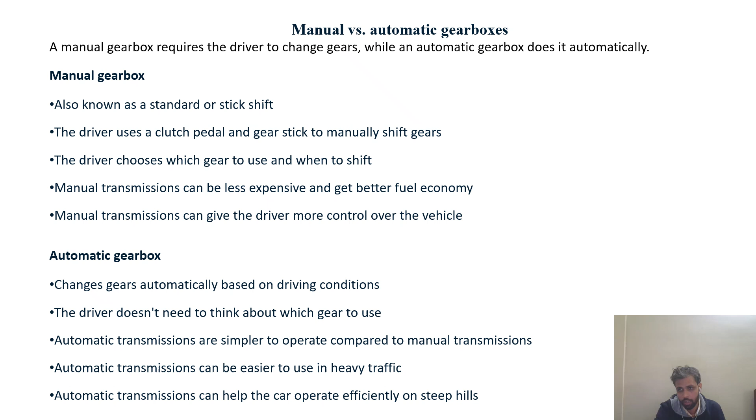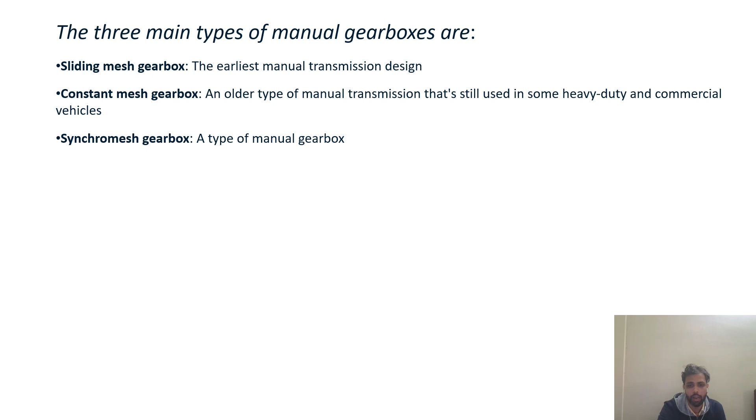The manual gearboxes are classified into three types: sliding mesh gearboxes, constant mesh gearboxes, and synchromesh gearboxes. We will look at all of these one by one.

The first one is sliding mesh gearboxes. The construction of this gearbox can be seen over here. Let me just find out if we have certain details shown.

This is the clutch shaft, or input shaft. This input shaft is connected through the engine, or we can say the crankshaft. Here we get the input power, and as per the requirements, as we go through the gearbox, I am expecting that you guys must be aware with the different gears and their functions.

What happens if a higher gear runs a lower gear? If a bigger gear, with bigger pitch circle diameter, runs a gear with lesser pitch circle diameter, or the lesser runs the bigger one. So I am expecting that you must be aware of all this.

So here, different sizes of gears are shown. What happens is these gears just slide over the output shaft, and mesh with the lay shaft. It meshes with the gears provided over the lay shaft, and we obtain the desired condition: high torque, low torque, or medium torque.

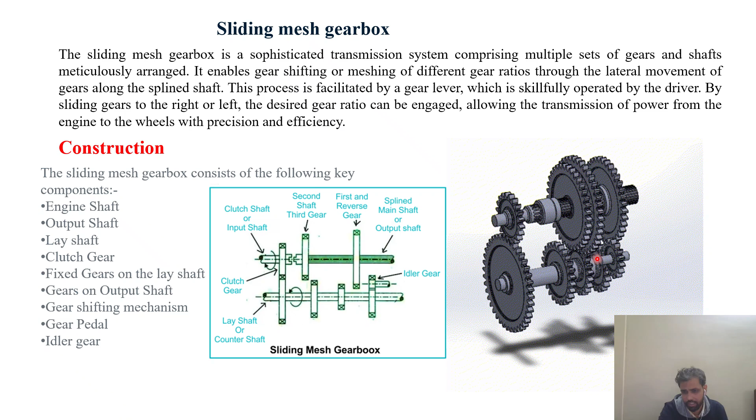We will see through the animation how the gear slides over the output shaft and gets meshed with the gears over the lay shaft, and the power is transmitted through the input shaft to the lay shaft and this gear, and then the gear slides and meshes with different gears to obtain different torque and speed combinations.

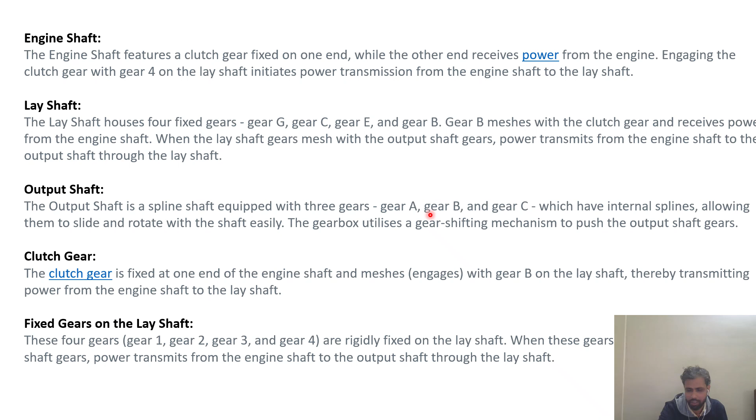So you can see the construction, and all these details are written over here so that you guys can get the notes. We're not going into all those details now.

Here, just see. So there are certain gears: first gear, second gear, third gear, fourth gear, back gear, or neutral position. First we will know about the neutral position.

In the neutral position, the output shaft - what is the output shaft? This shaft - the output shaft gears do not mesh with the gear over the lay shaft.

It is just meshing. So suppose if no gears over the output shaft are in mesh with the lay shaft, then power will just come through this and go wasted through this.

So no power will be available over the transmission line, so no movement of the vehicle's wheels will be there. So these positions are neutral.

So we can just say that at neutral position, although the engine is running, the transmission unit does not provide any movement over the wheels.

Now we see the first gear. To achieve the first gear, this gear C just moves and gets meshed with gear 2. So now the power will be transmitted through the engine shaft to the lay shaft.

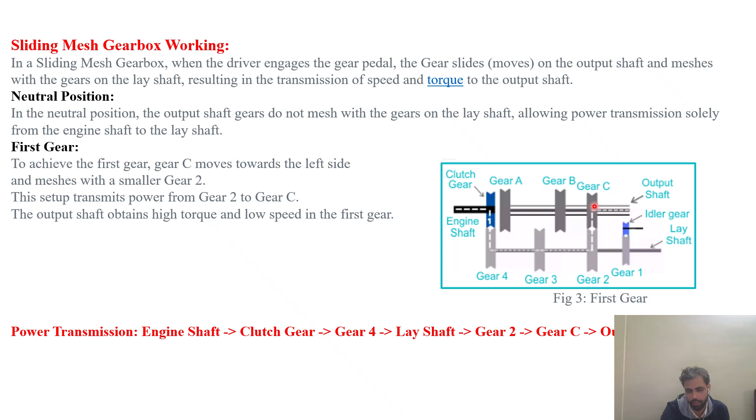As we know, on one shaft, if two gears are in mesh, their direction will be opposite. If three gears are in mesh, their direction will be the same. So by adding one extra gear, we let our vehicle move in the opposite direction to the others.

So likewise, we will obtain the second shaft and all those second gears, and likewise we are also getting all those gearboxes. You can just see through this animation if it is working.

Just see the input shaft, the green line input shaft, through gear 2, gear 3, and then gear 3 and 4 are in mesh. This 4th gear is just slid over this, and it will be connected.

Power will be transmitted through this input shaft to this shaft, this 3 to this, and then through the output shaft it will be available over the propeller.

So like this, just have a look once again. Yes, so likewise, we will obtain different gearing systems.

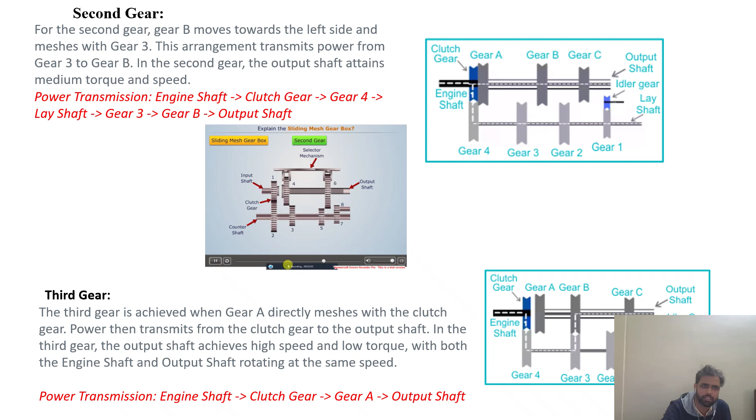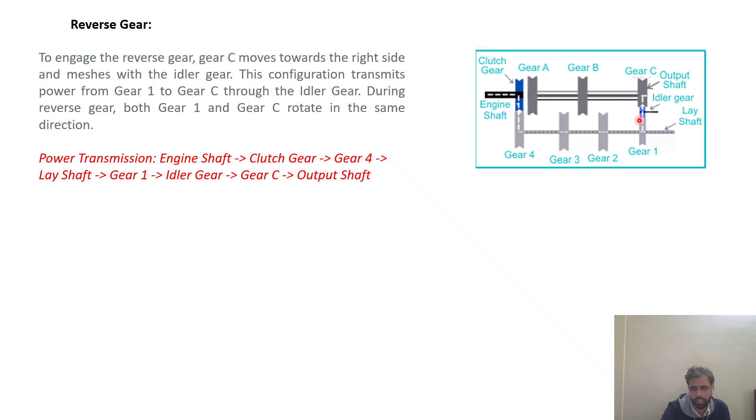Second gear, reverse gear. As we said earlier, in reverse gear, the idler gear will be connected. So likewise, we obtain all those sliding mesh gearboxes.

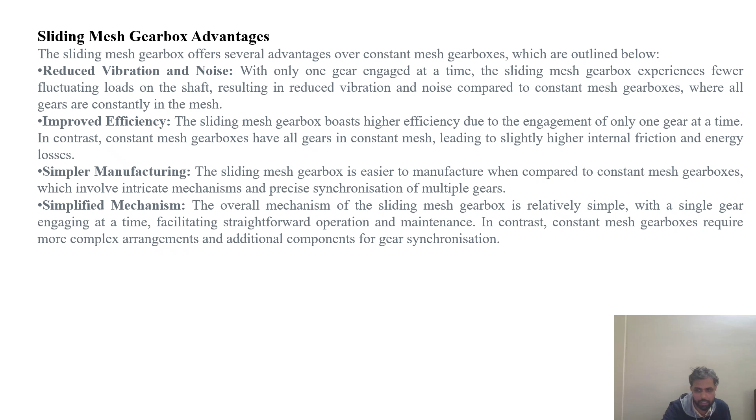It slightly improves the efficiency. It is relatively simple to manufacture, and it considers a simplified mechanism, just sliding the gear over the output shaft.

Apart from advantages, there are certain disadvantages. We have just covered certain advantages, and apart from these, certain applications include the Alfa 12HP, which is used in these vehicles.

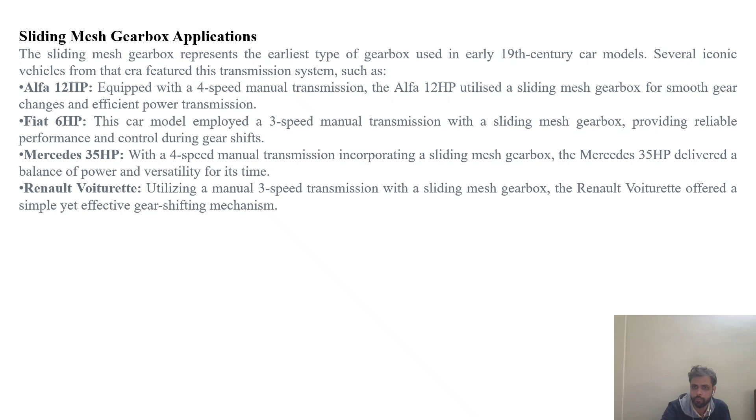The vehicles that we have written are Mercedes 35HP, Renault also. So now we will move over to the constant mesh gearboxes.